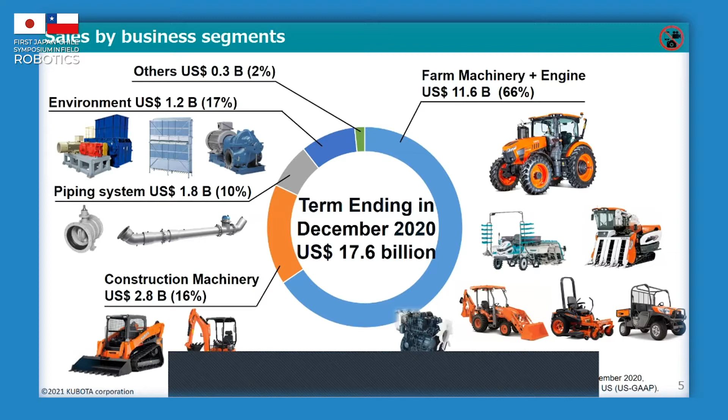Next, take a look at the sales by business segment. The total sales in 2020 reached about 18 billion US dollars. As you can see, two-thirds of our business comes from the farm machinery business, including agricultural machinery and engine business. We are now competing for second place with CNH in the agricultural machinery segment, and we hold the largest market share in industrial diesel engines with 100 horsepower or less.

We have a global sales network covering over 110 countries, and we have 14 overseas production sites in North America, Europe, and Asia. As for regional sales, Japan is only 32%, North America is 35%, already larger than Japan. Europe is at 12%, and Asia is 7%.

Of course, we also have a sales network in Chile. A distributor called Southmax sells our products and covers central Chile with 17 outlets. They have a market share of about 15% on tractors in Chile. If you have a chance, why not drop in at the head office in San Bernardo?

Kubota aims to be a global major brand which is trusted by the maximum number of customers around the world. Not just supplying products, we provide solutions and new value to our customers through innovations, utilizing new technologies such as ICT, IoT, and AI, etc.

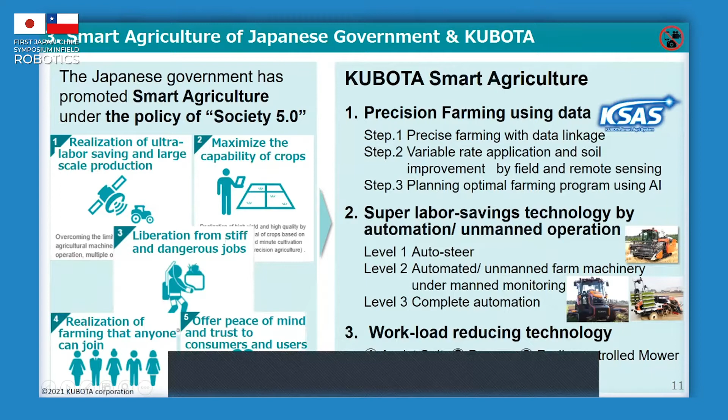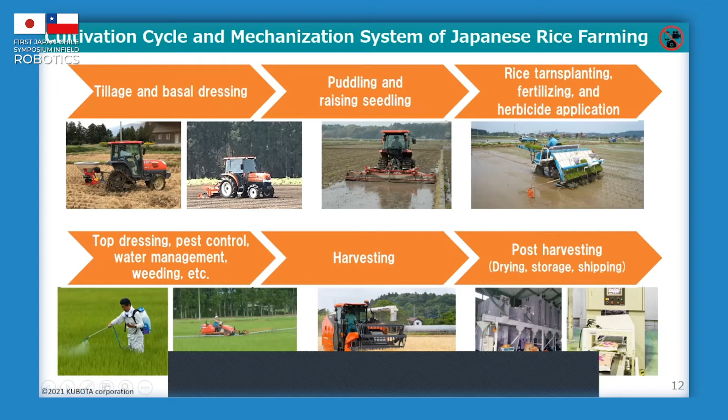This shows the cultivation cycle and its mechanization system for Japanese rice farming that has been developed so far. Today, almost all work is mechanized. However, intermediate works such as top dressing, spraying, water management, and weeding are often still done manually. So we also have to reduce this hard work, which harms human health, by introducing smart agriculture.

KSAS is a farming management system that realizes a profitable PDCA-based agriculture by utilizing various agricultural data on farm works, crops, and field environment through connected agricultural machinery and field and remote sensing systems, etc.

KSAS enables the following: number one, producing good taste rice or crops in high yield; number two, transferring agricultural skill and know-how by communicating farm work information correctly, which prevents workers from making mistakes; number three, ensuring safety of crops by recording the traceability of farm work; number four, reducing total cost and raising profitability.

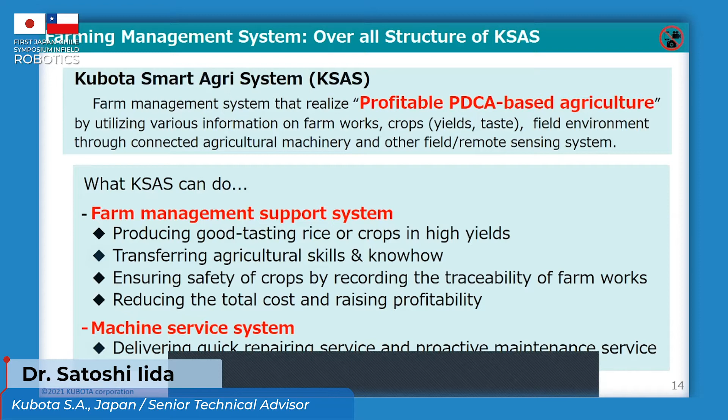This is a schematic diagram of KSAS. The structure is quite simple. It consists of three components. One is KSAS agricultural machinery equipped with Wi-Fi or direct communication units, which collect crop data and machine operation data by various sensors.

Second is a KSAS mobile owned by workers on site, which transfers the data from KSAS agricultural machinery and his work record. Vice versa, the working plan and daily schedule made by the farm manager is transferred to the workers via KSAS mobile. Third is the KSAS cloud, in which various agricultural data are accumulated hierarchically on each farm lot

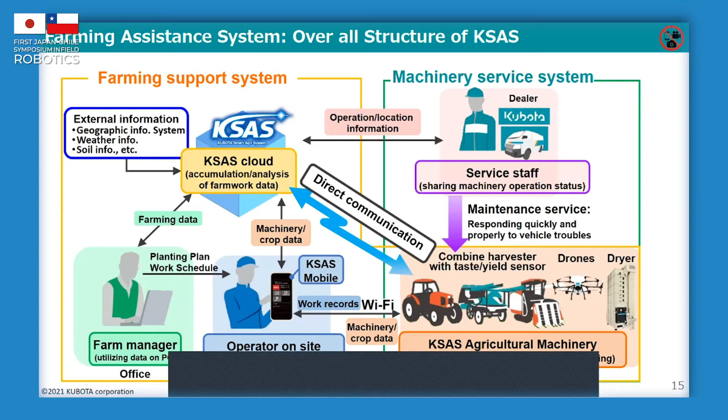and analyzed in order to propose adequate farming work such as fertilizing, pesticide, and water management, etc., utilizing external information such as weather forecast. On this scheme, farm support systems and machinery service systems are configured.

I will explain the overview of KSAS step 1, which is currently fully in service. Step 1 is to realize the Japanese-style data-driven precision farming connected with agricultural machinery for rice or crop farming.

KSAS provides a farm work management system in which the farm manager creates a planting plan and working plan based on the map of each farm lot and is able to monitor the progress of farm work. And KSAS also provides PDCA-based agriculture connected with farm machinery as follows.

This machinery, I will talk more about it next. This is a combine harvester with taste and yield sensor, which plays one of the most important roles in the KSAS system. This machine can measure the moisture and protein content of paddy, which has a negative correlation with taste, by infrared spectroscopy, and also measures the yield by a load cell under the grain tank.

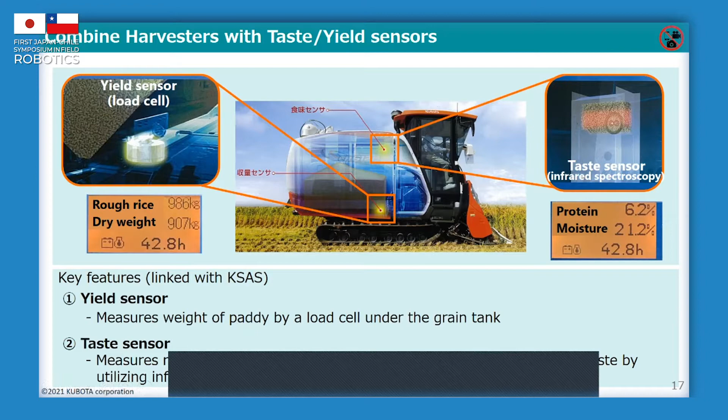This data is sent to KSAS cloud via mobile or direct communication unit. I will explain how to realize a PDCA-based agriculture.

Number one, based on the data from the harvester, we can grasp the distribution of yield and taste of each farm lot at a glance, like the left graph. You can see this graph. Y-axis shows the yield, X-axis shows the protein content,

and this pink zone shows the target zone. Number two, by sorting high quality product within this target zone, the farmer can sell it at a higher price.

Number three, then by analyzing this data, it enables creating a specialized fertilization plan for each farm lot. This fertilization plan is sent to the agricultural machinery through KSAS mobile or direct communication unit, and the machinery automatically controls the amount of fertilizer for each farm lot.

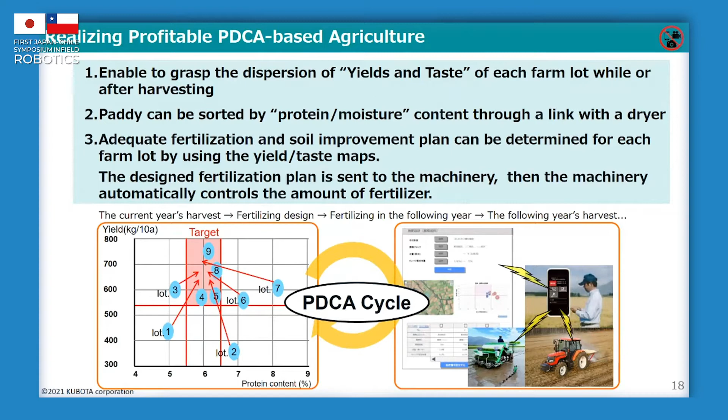In this way, we are able to improve the yield and quality of our product year by year by rotating a PDCA cycle.

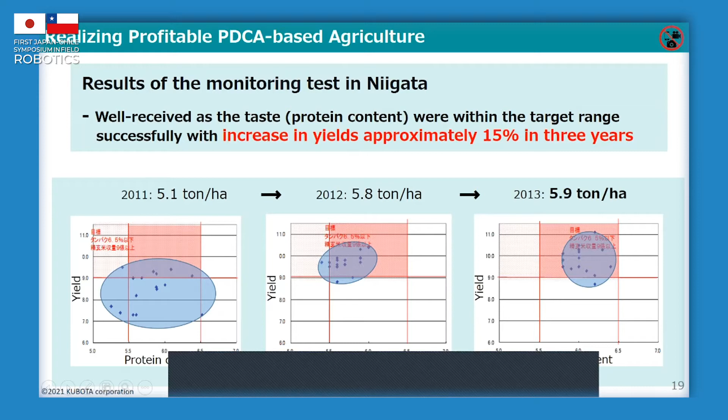Now, I will show you the conceptual movie on KSAS.

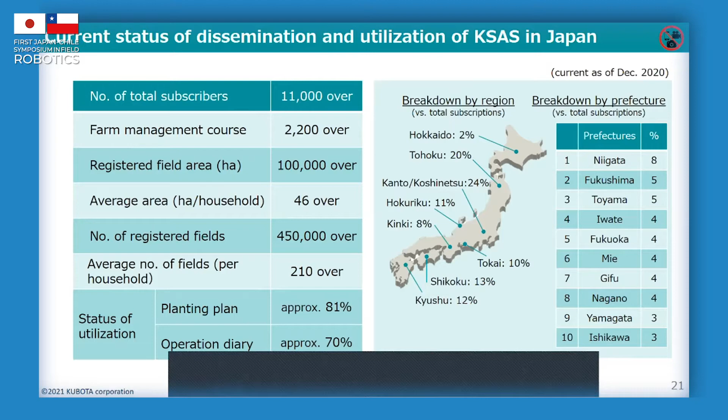Here I will explain the direction of future evolution of KSAS. As mentioned earlier, step 1 has been almost completed, and we will strengthen the development from rice and upland farming to vegetable and fruit farming.

Step 2 is the next step of the Japanese precision farming, which we are currently tackling. The Japanese government has reinforced the improvement of farmland infrastructure, which includes the consolidation of small farm lots. As a consolidated large farm lot is composed of several small farm lots, soil conditions vary from place to place.

Crop growth is affected by soil conditions as well as weather, water level, field environment, pest, and weed, etc. So in step 2, we grasp the unevenness of growth by utilizing field and remote sensing in addition to the dispersion of yield and taste. And we perform more precise control of the cultivation process, that is variable rate application of fertilizer and pesticide, water management, etc.

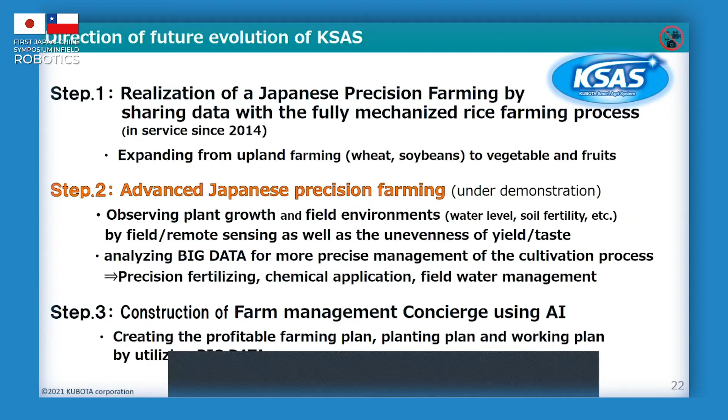Step 3 is the construction of an advanced farming support system using AI, etc. I'll explain the outline of each step next.

Step 2 consists of four original technologies. Number 1 is mesh-map combine harvesters and variable application of fertilizer. Number 2 is remote sensing and variable top dressing and spraying. Number 3 is the automatic water management system with water level sensor. Number 4 is the determination of optimum timing of cultivation work by utilizing weather forecast and the plant growth model.

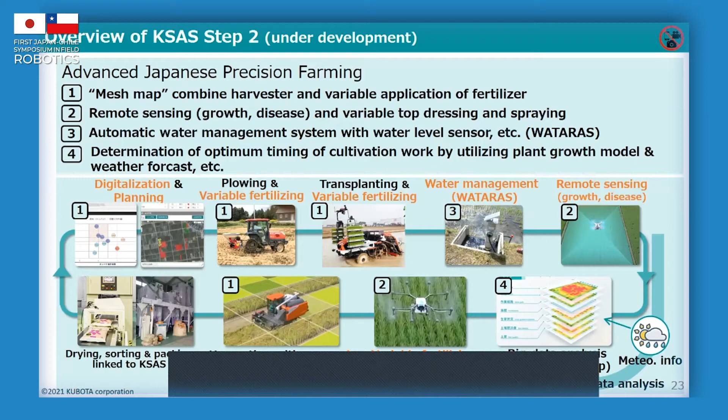Next, I will explain number 1 to number 3. This screen shows the mesh-map combine harvester that is a core of KSAS step 2. This combine harvester is equipped with a new sensor system that can measure yield and protein content every several square meters based on the position information of GNSS.

So it's enabled to create a mesh map of yield and taste. In addition, the direct communication unit allows these data to be sent to the KSAS cloud automatically. This general purpose combine harvester can harvest not only paddy rice, but also upland crops such as wheat and soybean.

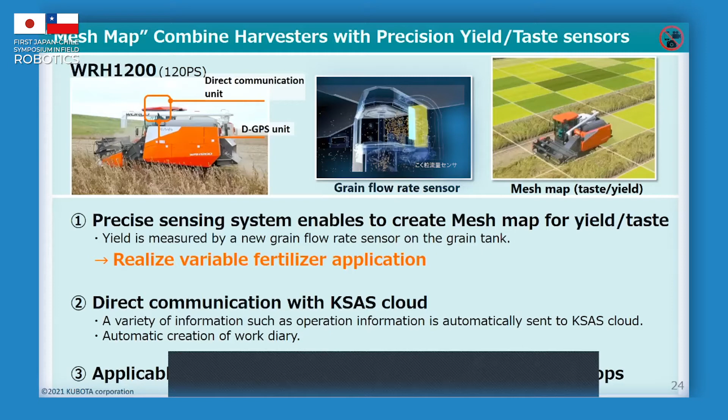This screen shows an outline of the variable rate fertilization based on the mesh map data obtained by the combine harvester. The mesh map data of yield and taste is stored hierarchically on the GIS of each farm lot, together with soil analysis data, like this center one. We call this data structure the KSAS layer map. By analyzing this data, a variable fertilization map is created by an original algorithm.

Based on this variable fertilization map, variable fertilization is carried out using a spreader or a drone, etc., that can adjust the amount of fertilizer for each mesh. As a result, it became possible to make each farm lot have less dispersion in yield and taste.

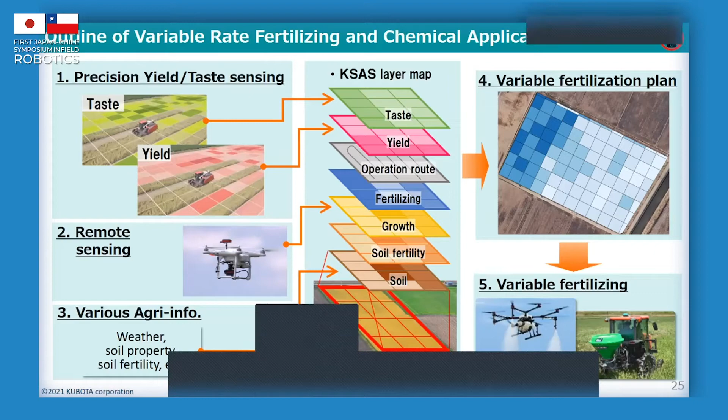This is a result of a variable rate fertilization test, as you can see in this upper left figure. In the first year, the yield data at the right side of the field was lower than the other part. As a result of variable fertilization in the second year, we could achieve both increasing the yield by 25% and improvement of the dispersion in yield.

The lower part of this figure shows the change in protein content. We also found an improvement in the dispersion.

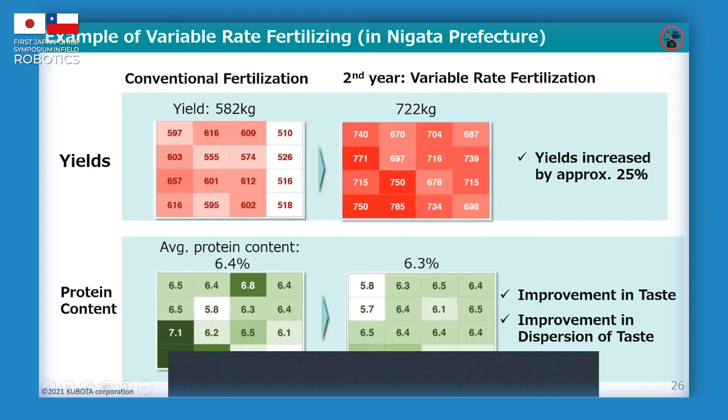Next, I will talk about remote sensing by drone and variable top dressing, etc. This sheet shows the specification of remote sensing drones and their features. Number one, the drone is equipped with a 5-band spectral camera for agriculture. Number two, it is capable of collecting a wide range of growth indicators such as NDVI, etc., in a short time. For example, only 15 minutes for 10 hectares.

Number three, the original algorithm makes it easy to generate a growth map and upload it to KSAS. Number four, based on these maps, you can perform variable rate top dressing in a similar way as shown before.

This figure shows an example of remote sensing. 12 hectares of field composed of 40 farm lots was photographed at once in the rice ear formation period. It only takes 30 minutes to generate this NDVI map and upload it to KSAS. By examining the farm lot with large color change, like this one, you can find abnormal conditions and take countermeasures such as top dressing and chemical spraying.

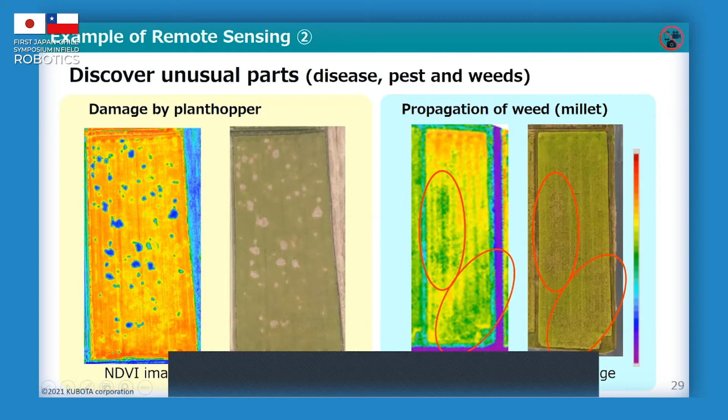This figure shows two examples of fields damaged by pest and weed. The left photo shows a field damaged by plant hopper. It's easy to find the damaged place using NDVI image rather than RGB image. The right figure shows a field with heavy weed. You can also find them easily using NDVI image.

The third technology is the water management system called WATARAS. This system has been developed with NARO, the National Agriculture and Food Research Organization. In this system, based on the water level sensor shown here in the center, the water level of each paddy field is adjusted automatically by controlling the supplying and drainage valve.

Water level data is sent to the cloud together with water temperature via LPWA and a relay communication unit. It enables remote monitoring of water level by smartphone and program control of water level.

So instead of a farmer having to look around many paddy fields and adjust the water level one by one, after launching the system in 2018, approximately 80% labor reduction in water management was proven in many experimental projects. Now, utilizing weather information and a growth model, an optimum water management method is under development.

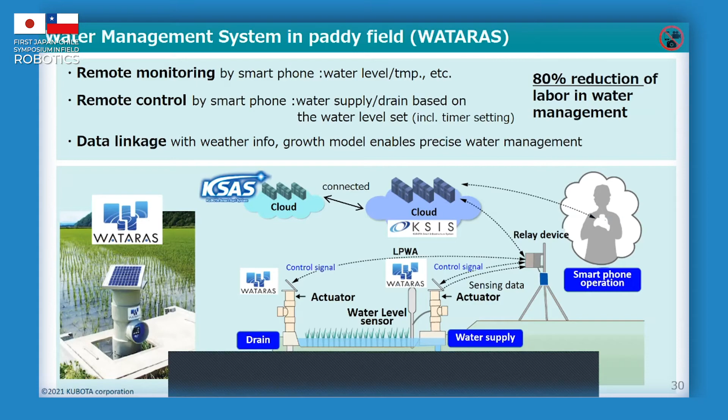Utilizing WATARAS, a total water management system for the farming area is being developed through a project sponsored by the government. This project aims to control the whole water supply from reservoir to field and to contribute to saving water for the whole farming village.

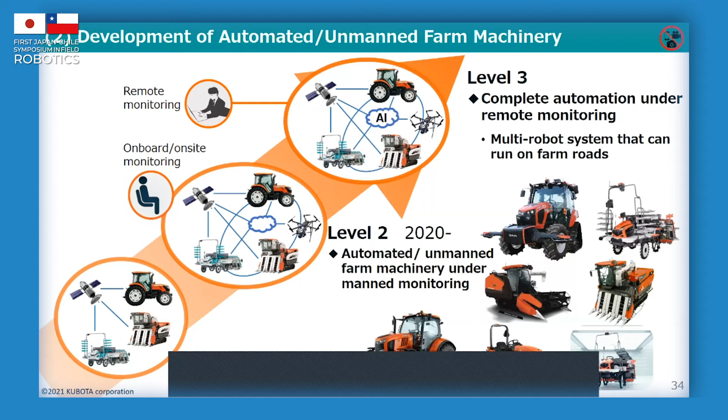This is the roadmap for Kubota's development of automated and unmanned farm machinery. We have been reinforcing the development of level 1 and 2 machines named the AgriRobo series. As a result, level 1 machinery is becoming more and more popular in the Japanese agriculture market.

However, as for level 2 machinery, advanced farmers have just started using it in many verification projects for smart agriculture. As for level 3, it requires not only research and development, but also the creation of standards and infrastructure in cooperation with the government.

Therefore, we are now working on several governmental projects, cooperating with government, industry, and academia, under the strong leadership of Professor Noguchi. Hereafter, I'll introduce some level 1 and level 2 machines, not level 3. Level 3 was already presented by Professor Noguchi yesterday.

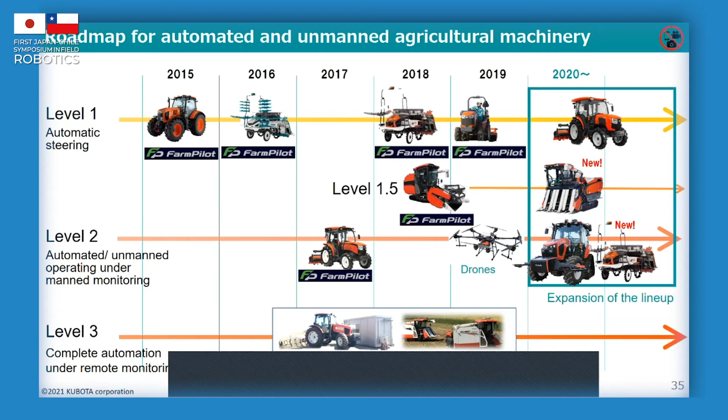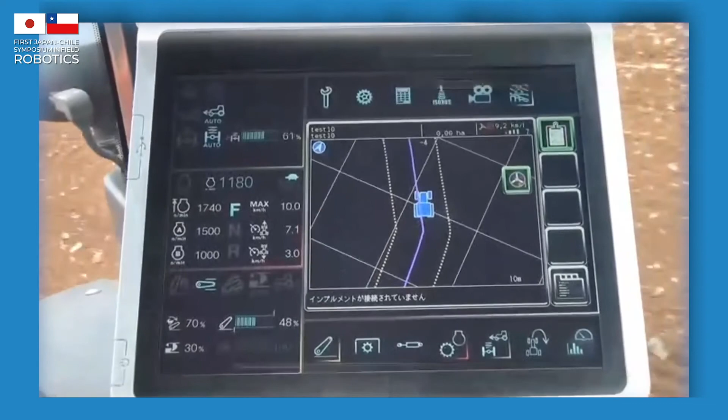First, please take a look at the movie of the auto steering of the large plant farming tractor, the M7 series. This machine is equipped with RTK GNSS, similar to other companies, but superior performance is realized by developing original control algorithms.

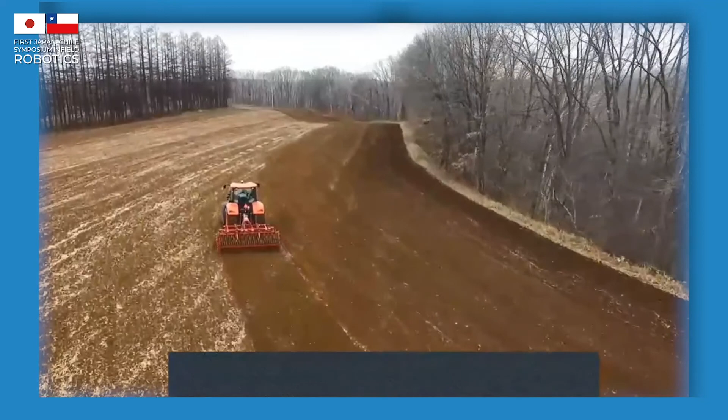The next is a rice transplanter with a straight traveling function, launched in 2016. We developed Kubota's original control system by combining a DGPS unit and inertia measurement unit, IMU. We were able to offer the straight traveling function at a much less expensive price than conventional RTK GNSS systems. Of course, this system is not as accurate as RTK GNSS, but the performance is found to be sufficient for professional farmers.

In addition, we are able to add the following new value to customers. Number 1, making straight traveling easier, even for beginners and part-time workers. Number 2, relieving operators' stress. Number 3, improving efficiency by allowing the operator to check seedlings and fertilizer quantity while planting. For this reason, this feature was well accepted by professional farmers and it became popular for the professional models.

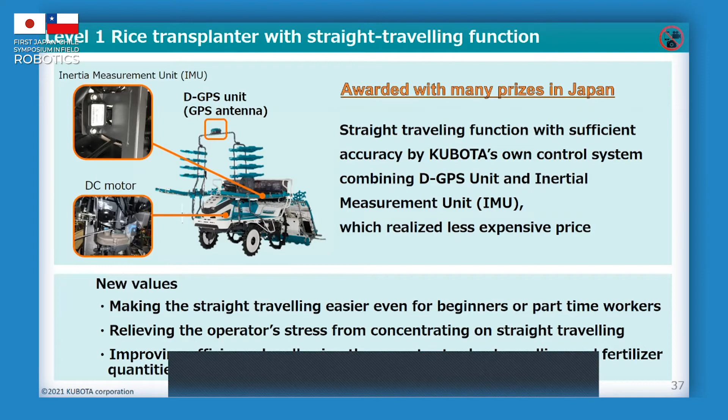Now I'll show you the movie of the first transplanter models with the straight traveling function.

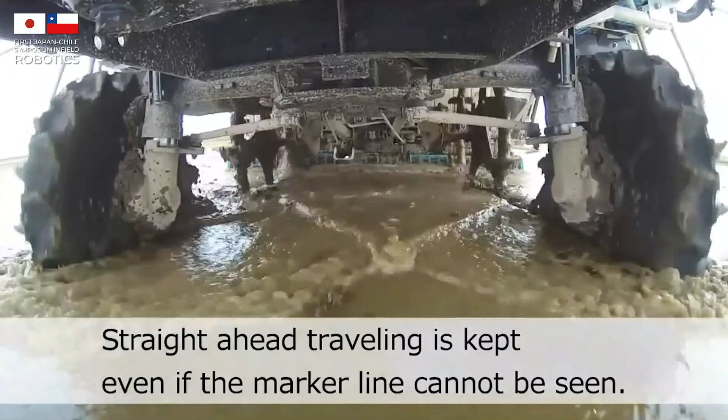Next is a small and medium-sized tractor with a straight traveling function, launched in 2019. The concept of this system is almost the same as the rice transplanter. These tractor models are also becoming more popular in Japan.

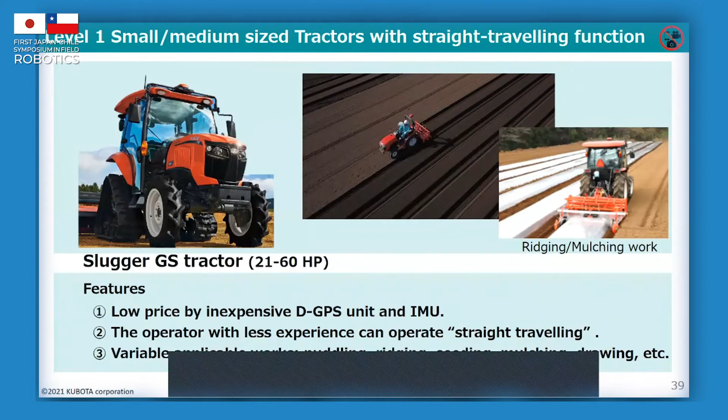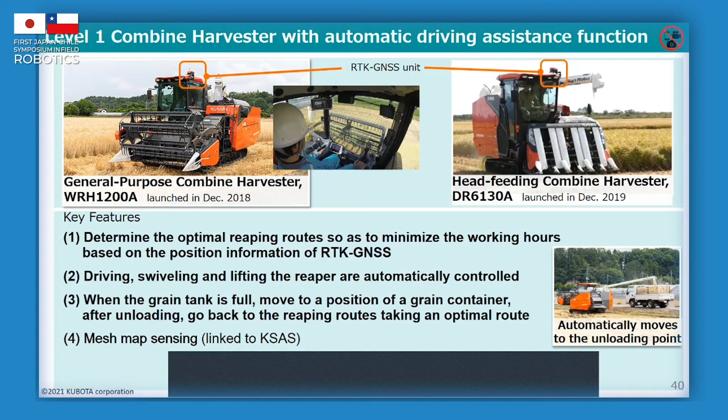In addition, by estimating the position where the grain tank is full, the machine moves to the grain containers for unloading, then goes back to the optimum restarting position by calculating an optimum route. This automatic driving assistance function enables operators with less experience, like the younger generation, to perform efficient harvesting and reduce their workload.

Now, this is the first level 2 unmanned tractor, named AgriRobo SL60A, which we started test marketing in 2017.

The high precision RTK GNSS unit, which we manufactured in-house, made it possible to perform automatic driving with a single unmanned machine. And second, cooperative driving with a pair of manned and unmanned machinery working together, reducing operator stress by means of the automatic steering function.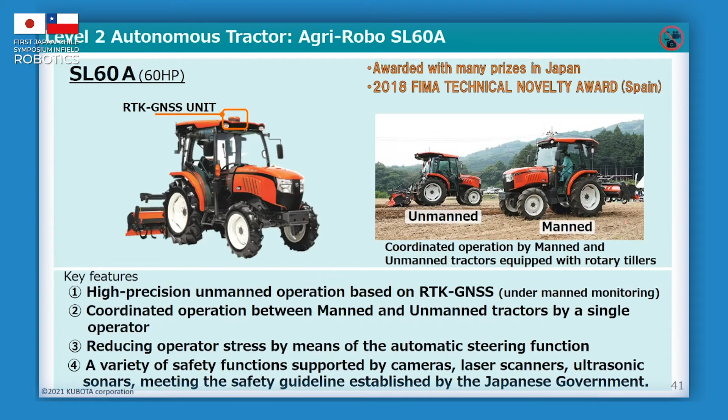I'll explain how to define the outline of the field. The shape of the cultivated field is measured and memorized by driving the tractor around the outer circumference of the field. You can even define a non-rectangular field in the same way. Once the field shape is memorized, it can be reused at any time you like.

Only the inner parts, except the outer circumference, are cultivated automatically.

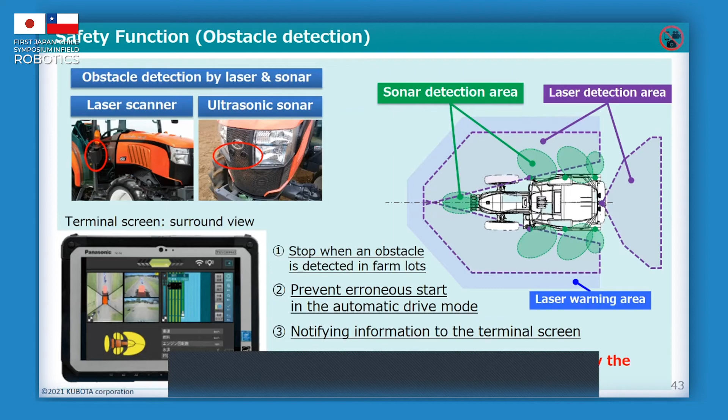As for safety, it has a variety of safety functions supported by 4 surround view cameras, 3 laser scanners, and 8 ultrasonic sonars, which meet the Japanese safety guidelines established for unmanned tractors. If obstacles are detected within this range, the tractor stops automatically or doesn't start moving.

Now I'll show you the movie of the AgriRobo tractor SL60A. This is a cooperative operation of two machines, manned and unmanned machines.

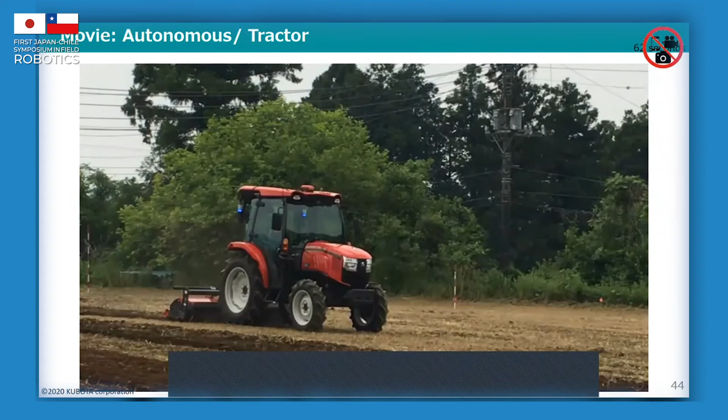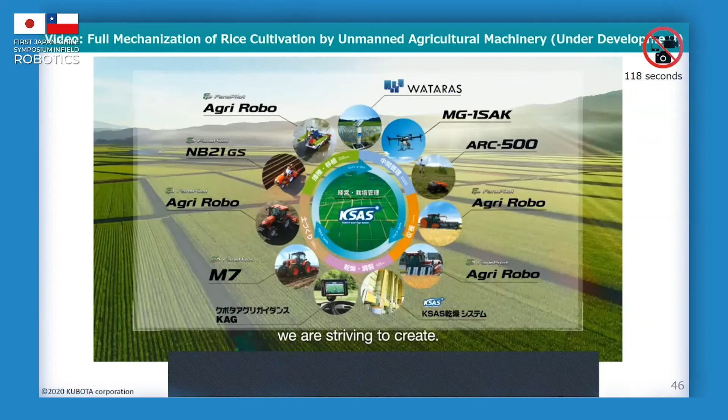These are all commercialized. Now I will explain the several challenges to popularize the level 2 machineries.

Number one, refining the safety functions by utilizing AI image processing in order to prevent misdetection. Number two, increasing the ratio of autonomous operation in one field. The ultimate goal is to be fully autonomous.

Number three, broadening the range of autonomous work by applying it to various implements. Number four, improving the infrastructure such as RTK, GNSS base stations, and farmland consolidation for autonomous operation. This is a role of the government or municipality.

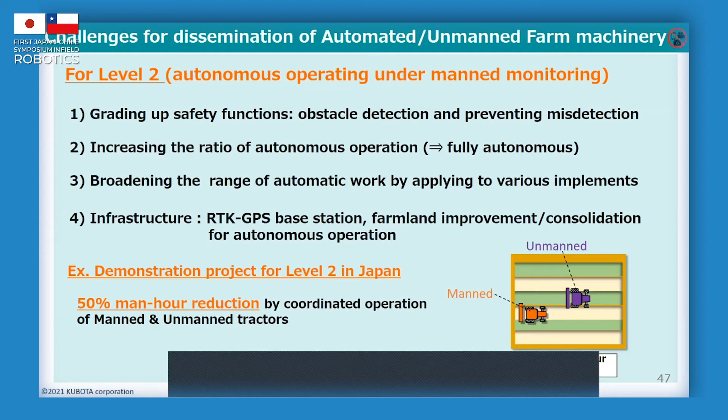Regarding the challenge of level 3, this part is almost the same as Professor Noguchi-san said yesterday. But I'll just emphasize the second one: high-speed communication networks, including 5G, are necessary. So I will skip the rest.

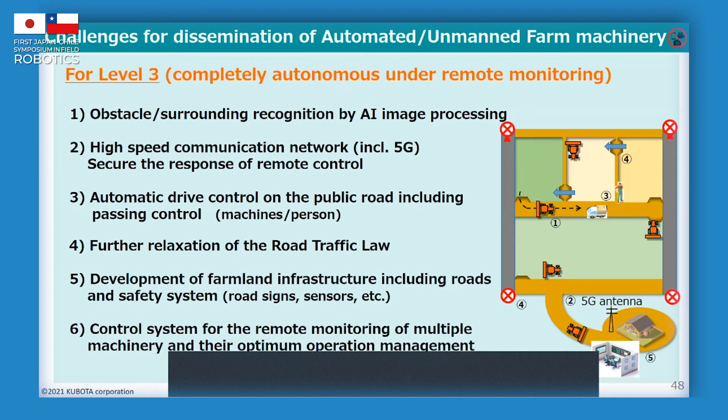Next, I will explain some technologies for labor saving and workload reduction which are already on sale. Number one is a spraying drone, which has become very popular in Japan. Number two is a radio-controlled mower, which enables stable mowing even on 40 degree ridges.

Number three shows an assist suit Raku Vest used in orchards and vineyards. Number four is a winch-type power assist suit for lifting heavy harvest containers, etc. Sorry, I don't have enough time to explain more.

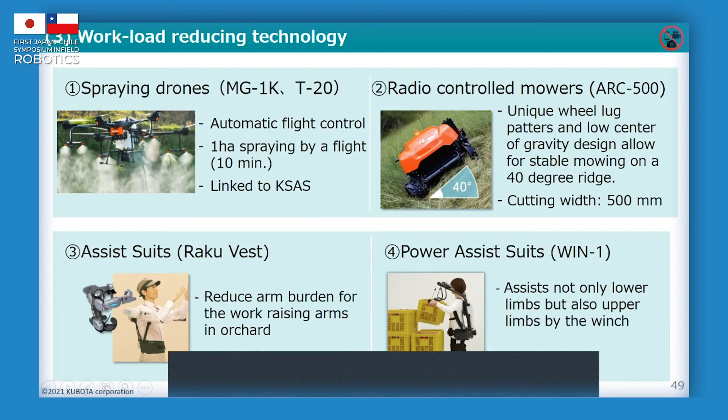The government has set a goal for almost all professional farmers to use data by 2025. Now I'll introduce the initiative of the Japanese government to promote smart agriculture.

Number one is supporting the development and introduction by agritech ventures. Number two is enhancing training and education in agricultural high schools and colleges. Number three is strongly promoting implementation of a demonstration project for smart agriculture.

Since 2019, 148 projects have been put into practice, and Kubota joined many projects. Number four is development of infrastructure in rural areas to be suitable for smart agriculture.

Number five is constructing an agricultural data collaboration platform named WAGRI, as I explained. Now I will introduce Kubota's effort for dissemination of smart agriculture.

Regarding R&D, we have endeavored to expand our product line. At the same time, we are working to improve our products and reduce costs by reflecting the true voice of our customers. I believe these smart products should be super user-friendly.

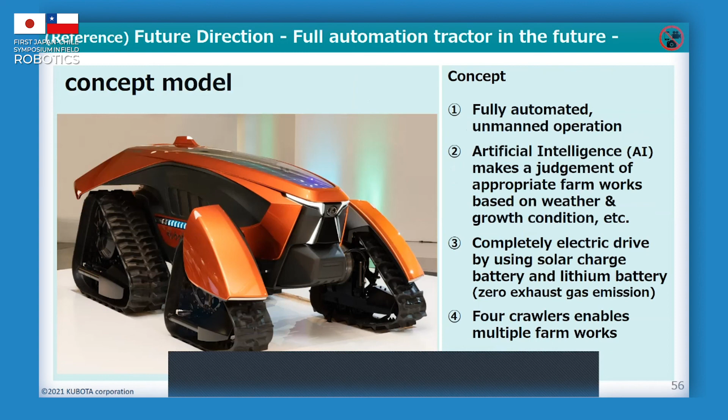This is the final slide. I introduced the concept model of the future fully automated tractor exhibited in January last year.

Finally, I hope that the cooperative relationship between Chile and Japan will be further developed. Thank you very much for your attention.